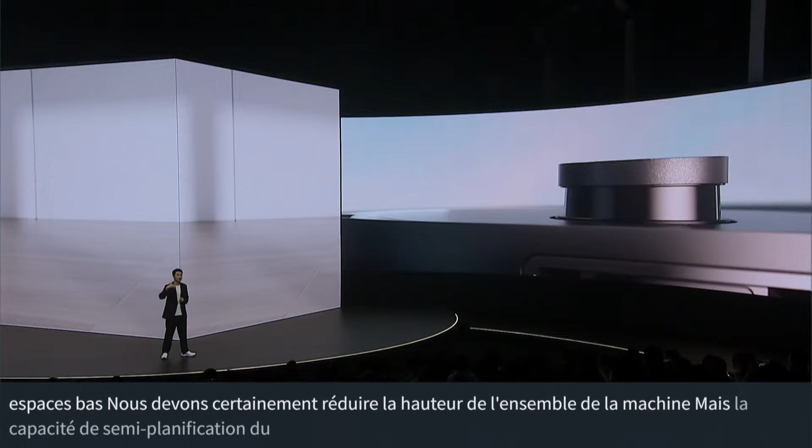First of all, when the robot wants to go to lower spaces, we have to reduce the total height of the robot. But when sweeping bots upgrade from gyroscopic inertial navigation systems to lidar navigation systems, it is doing a complete planning with a lidar module, which is normally 2 to 3 centimeters higher than the machine, so that it can have 360-degree scanning and a map to navigate during its cleaning. But this protruding structure has also made most sweeping bots on the market higher than 10 centimeters, and that becomes the biggest obstacle for it to go to low spaces. But for furniture that needs cleaning at the bottom, a lot of them have a space lower than 10 centimeters, so obviously that will be a neglected part during floor sweeping.

Actually, in the early stages, there were some ultra-thin sweeping bots, but they had to sacrifice navigation or obstacle avoidance effect just for thinness. But how can we ensure we maintain the smartness while also having access to lower spaces? That is the topic we wanted to research.

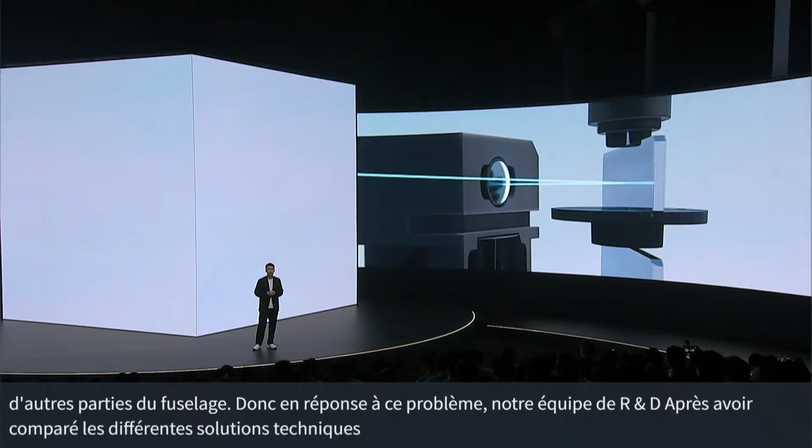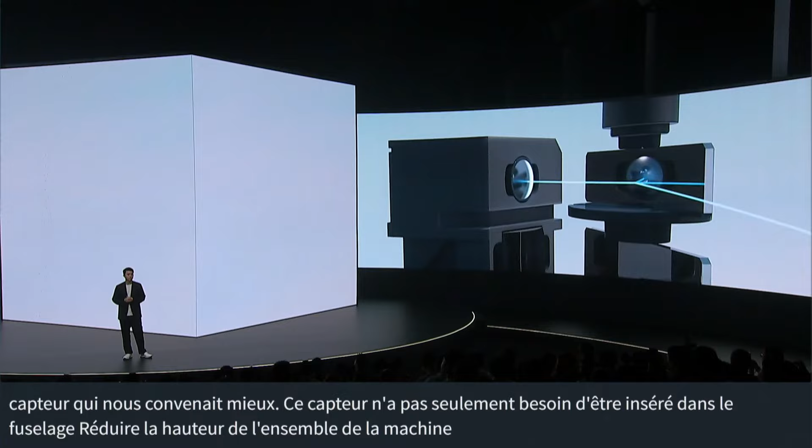We wanted to find a perfect alternative solution to replace the protruding part at the top. But we know that module, either LDS or DTOF, they all fall into the category of rotating mechanical lidar, which cannot be installed on other parts of the machine. Because of this, our R&D team compared different technologies and proposals. We decided to develop our own sensors, which not only can fit into the machine to reduce the total height, but can also avoid dust entering the sensor, as well as shortening lifespan because of long-term use of the motor.

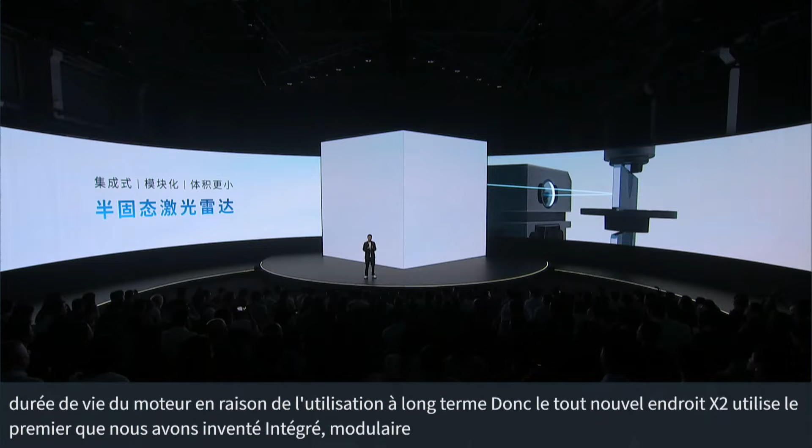So the brand new Deebot X2 is using this integrated, modularized, and more compact semi-solid-state lidar design we invented. We call this dual laser lidar, which is a composite laser sensor of a dual transmitter dual receiver system with doubled field of view. It has achieved 210 degrees angles of view. It can have more than 20,000 hertz ultra-high sampling frequency, so it can respond faster. It can be 24 times the traditional LDS in terms of detecting small objects, and also doubled what can be achieved with DTOF.

With this sensor and the algorithm, we can ensure the smaller sensor can fit into the sweeping bot. It can reduce its total height and also enhance its global planning capacity. We can also extend its durability. It has IP5X dust-proof closed design, which prevents dust from entering the module. It is more stable, more reliable, and more durable.

After we have chosen this alternative plan, the next step is where do we need to put it on the machine? First of all, we need to know the major task of such a sensor module is to help the sweeping bot localize itself in the home environment. If you have used sweeping bots, you know the lidar used to work by rotating 360 degrees. If we replace that with semi-solid-state lidar on one side, is it possible for it to detect the domestic information?

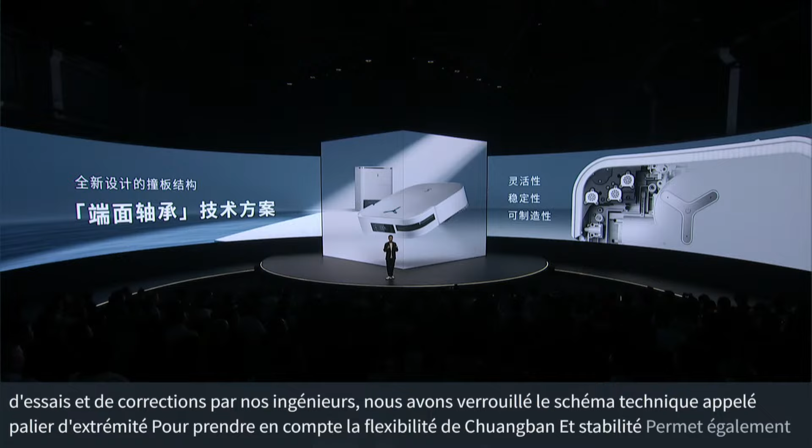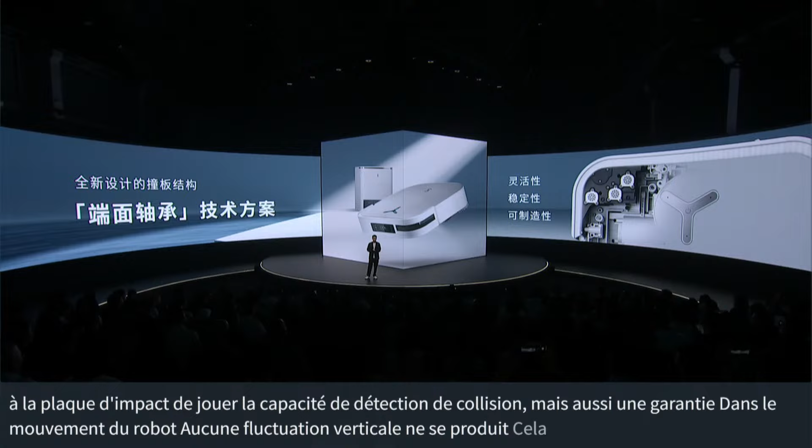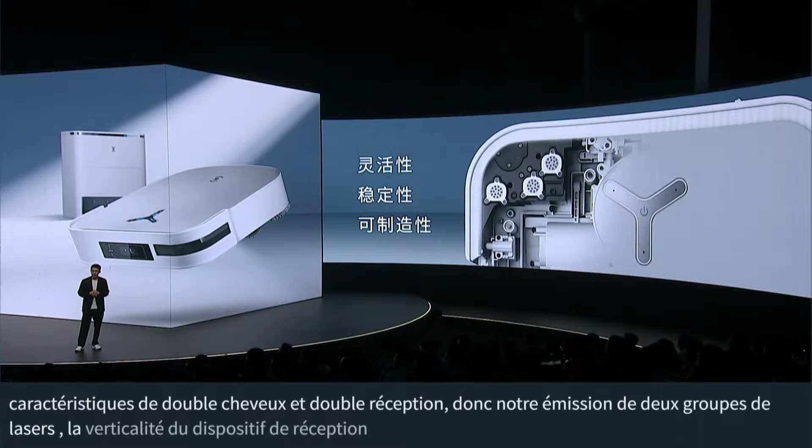After a lot of tests and correction, we have finalized the technical plan of end-face bearing to take flexibility and stability into consideration. So the bumper can have bumping sensing, but also it will not have vertical movement, and it will not impact the consistency of the LiDAR transmitting surface level. Because this has a dual transmitter and dual receiver, it has a very high requirement for the verticality, parallelism, and stability of both sets of the laser. That gives some challenge to our design capacity and manufacturability.

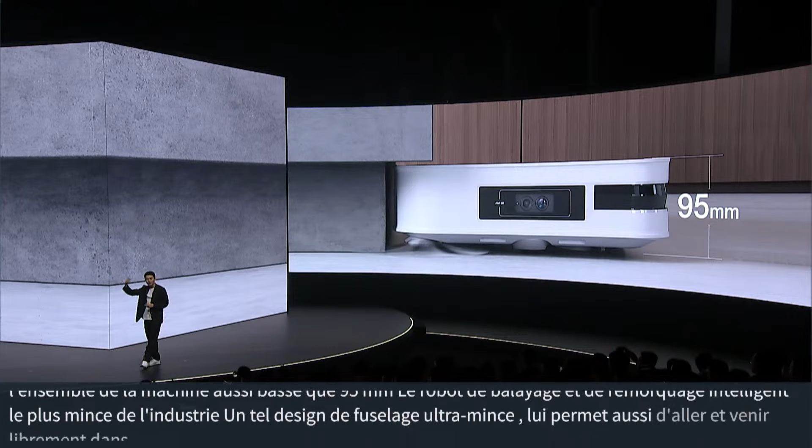Ultimately, we have put this more powerful LiDAR module into the machine, creating the integrated sweeping bot with a total height of 95 millimeters, which is the thinnest in the industry. Such ultra-thin design makes it able to access low spaces so that it can increase its cleaning coverage, but also maintain its strong global planning and localization capability. We believe for such innovation, which starts from products and from consumer needs, it combines with optics and algorithm transformation. We also need to ensure the quality of our delivery. Only an enterprise like Ecovacs that has both research and manufacturing can achieve such results.

In addition to the sensor and the total form factor redesign, we have also significantly improved the key cleaning performance of the sweeping bots. Let me introduce that to you. First, let's talk about edge cleaning. Actually, one of the biggest complaints from consumers about current sweeping bots is insufficient edge cleaning of round-shaped sweeping bots, because corners between walls and furniture usually accumulate a lot of dust.

But when a round-shaped machine meets a right-angled corner, it cannot fit very well. When it goes to the edge, because of the intrinsic constraints of the round shape, it cannot have perfect edge cleaning. That's why the cleaning of the edges and corners have always been a pain point for the industry. So we believe in order to solve the problem of edge cleaning, we need to jump out of the box. Our choice is, as you can see now, making sweeping bots from round to square, so the right angle will be aligned with the right angle so that we can reach the edges.

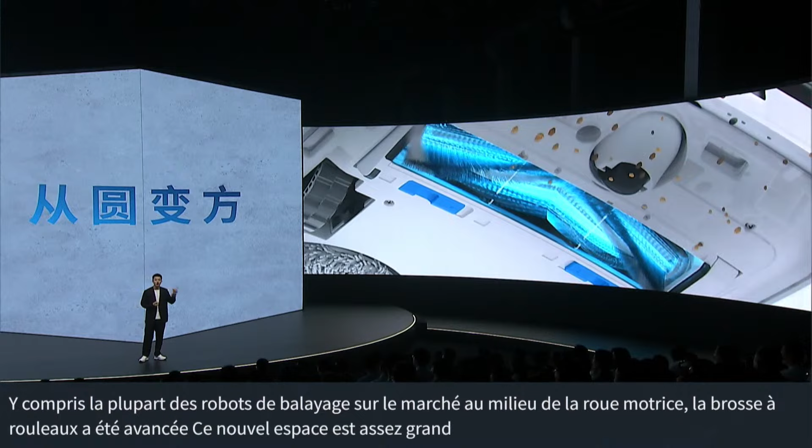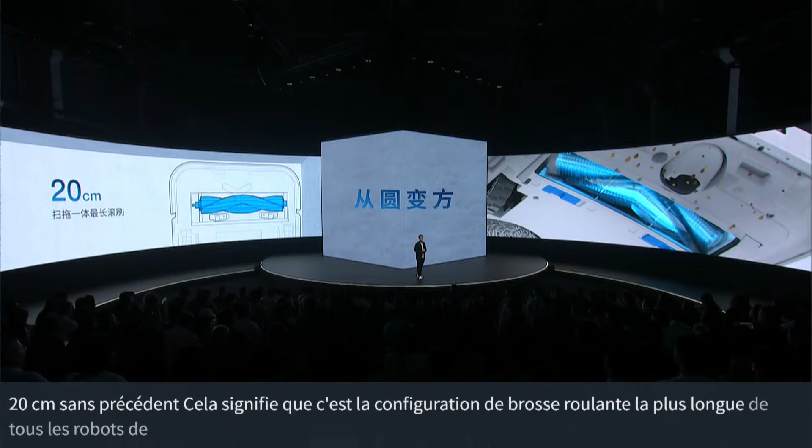This new space is big enough, and the main brush is also extended to an unprecedented 20 centimeters. This is the longest main brush for all sweeping bots on the market. We have also combined it with an upgraded 8,000 Pa suction power, so the cleaning efficiency is enhanced by another 20%. Thank you.

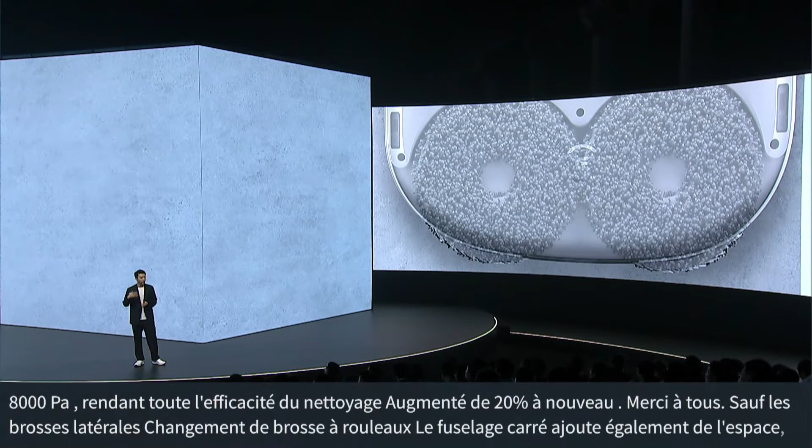In addition to the side brush and main brush, the additional space of the square-shaped machine allows the driving wheel of X2 to be extended. The mop plate will no longer worry about friction with the driving wheel, so that it can be further optimized.

For the brand new X2, we have shortened the gap between the wall corner and the mop plate, which has gone from 5.5 centimeters to 3 centimeters. So it has increased the sweeping and mopping coverage by 11.6%.

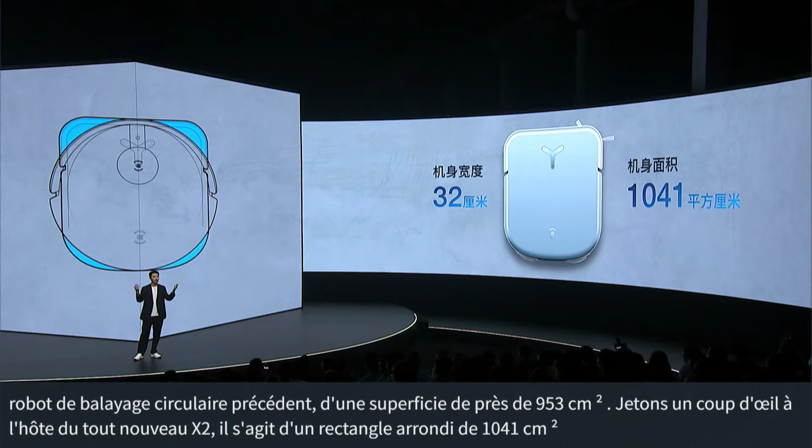Let's look at this picture. This is the old round-shaped sweeping bot with an area of 953 square centimeters. When we look at the new machine, it is a rounded rectangle of 1,041 square centimeters. By this comparison, we can clearly see the machine has more space, but the width has become narrower compared with the former 36.2 centimeters.

The width of X2 is only 32 centimeters, which is the thinnest in the industry. That also shows it can have access to more narrow spaces. In addition, although it becomes slimmer, we have significantly improved the internal structure of the machine, so the dust box space has increased by 14%.

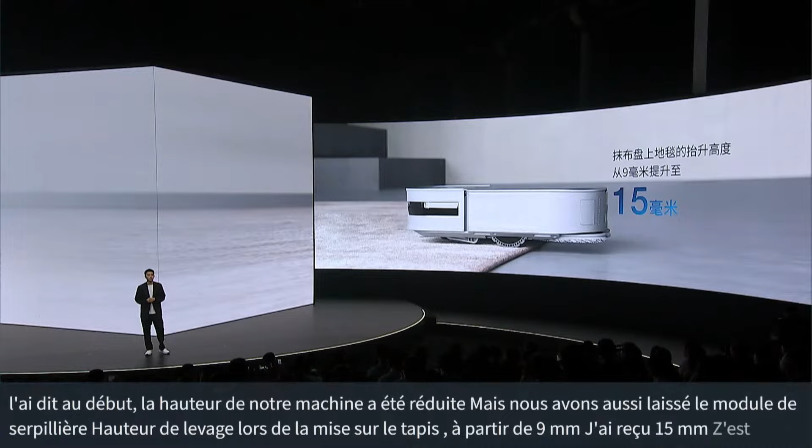The water tank capacity has increased by 125%, so the sweeping bot will have a more complete and efficient experience for each cycle. And also, although in the beginning I said the total height has reduced, we have made the elevation height of the mopping module increase from 9 millimeters to 15 millimeters, which is definitely the highest record for elevation solutions on the market.

So, through my introduction, we can see X2 is a completely redesigned new product. Also in terms of the arrangement and design of the overall structure, it has enhanced accessibility for lower and narrow spaces, cleaning coverage of unit area, stronger vacuum cleaning and sweeping capability, and also an enhanced experience. I'm sure Ecovacs, as one of the brands with the longest history in the industry, we never compromise on our cleaning capability, and we are going to enhance the cleaning capacity once again with X2.

So, apart from the square shape and the cleaning capability improvement brought by it, the other important aspect of a sweeping bot is its intelligence level, which is also a big aspect impacting user experience. It decides whether the sweeping bot can traverse very effectively and freely in the complex and dynamic home environment. So, in the square shape, the further core improvement is to have more accurate positioning and more nimble path planning.

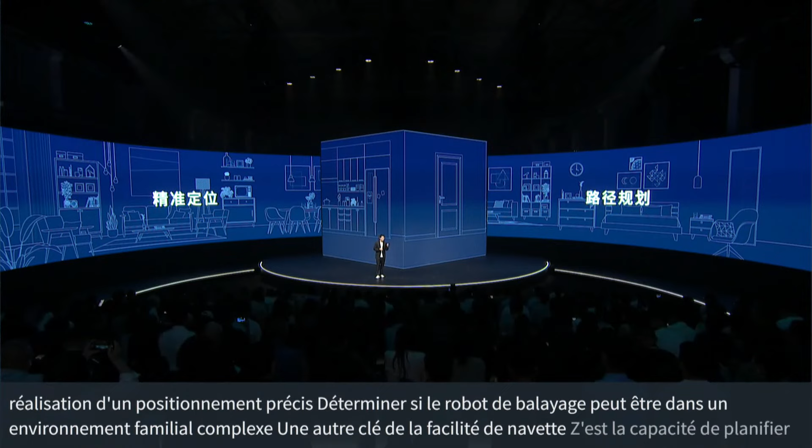And also, while realizing accurate positioning, another deciding factor on whether the robot can traverse very effectively in the complex home environment is path planning capability, because in the home there's not only static walls and furniture, but also moving human paths, doors, and occasionally fallen objects.

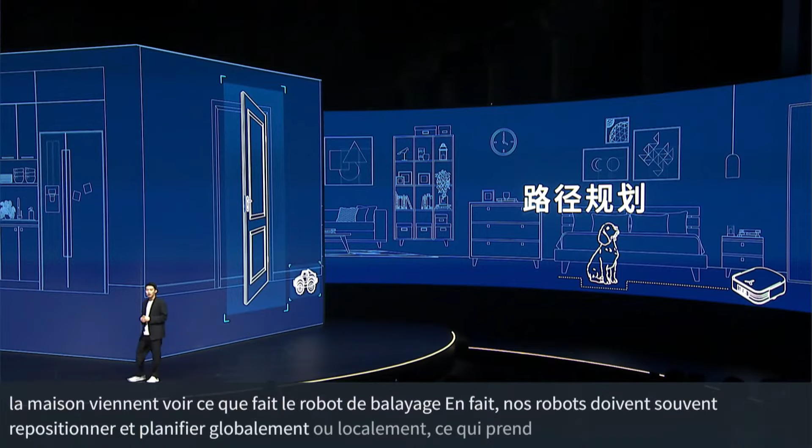So the sweeping bot, when planning the path with traditional algorithms, needs to rely on the established map and plan the path in advance. And when the designated path is blocked, for example, the path changes and the bot checks what it's doing, so the bot needs to do local or global planning again. Normally it's very time consuming, and sometimes it can cause hesitation or getting stuck.

So when faced with the ever-changing and various home environment, what Ecovacs thought was that we need to use better and newer technology to deal with them.

And then we introduced AI into the robots. If you are familiar with Ecovacs, you know that we are one of the earliest explorers. We continuously use AI to enable robots, and we have been exploring for many years. As early as 2018, we already deployed deep learning and enhanced learning, the two AI technical roadmaps.

First of all, for deep learning, in the sweeping bot graphic recognition, the implementation is reflected in the 2019 launched our own patented AIVI Deebot product. And then, with the combination of structured light and camera, we trained a better deep learning model and helped the sweeping bot further enhance its capability of object recognition, accuracy, and obstacle avoidance. And in 2021, the AIVI 3D tech-enabled X1 is the first implementation.

On the other hand, we continuously invested in enhanced learning. Enhanced learning is a kind of machine learning algorithm so that the robot can get experience from testing errors and then continuously improve the decision-making capability and improve the work performance. So when it comes to sweeping bot, it can help improve its decision-making capability and adaptability so that it can more effectively and flexibly conduct path planning, dynamic adjustment, and finish the mission.

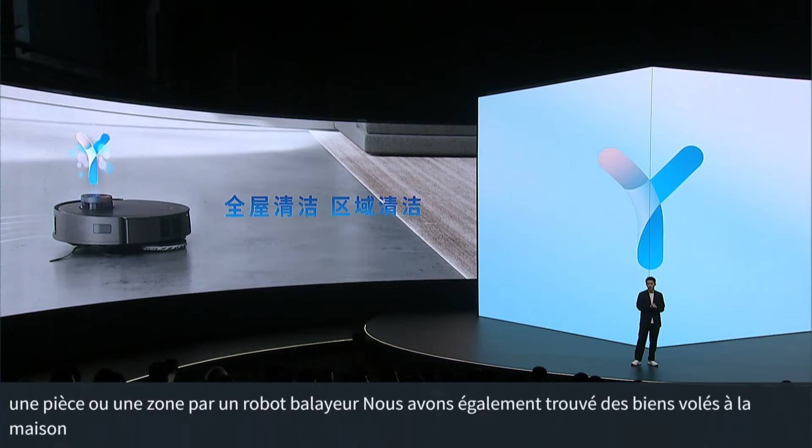At present, among the instructions from consumers, around 62% are commanding the robots to go to certain rooms and areas to clean. We also discovered that stains or dirt on the ground normally take place in an area without a name, for example beside the couch and the table, or in between the TV cabinet and the tea table. More than 10% of users are trying to use Eco instructions to clean these blurry areas. That means users have a very strong demand to use voice commands to realize more refined cleaning.

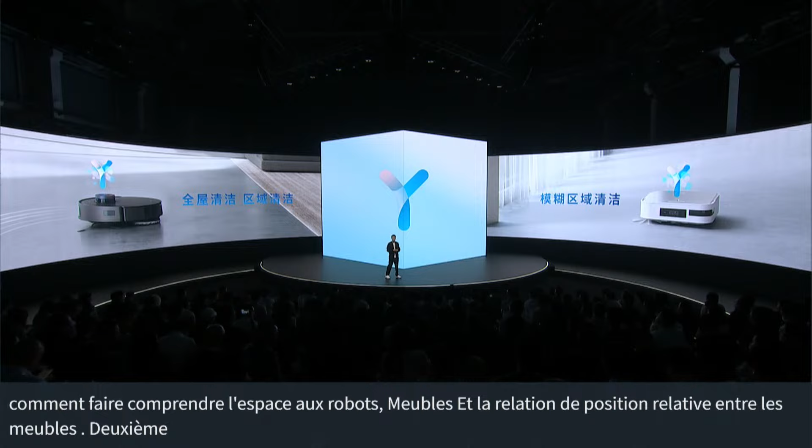So this time, we need improvement in two aspects. One is to think about how we let robots understand the space, the furniture, and the correlation between furniture. Second, we need to continuously improve the capability of the robots to understand different habits of instructions.

First, how do we let the robots understand the relationship of furniture location better? We need a clear furniture map. It is an innovative application of a knowledge map in the home environment. When X2 establishes a map, it treats furniture and rooms as entities and establishes a knowledge map that covers all the furniture, rooms, and their correlations. This is another important breakthrough technology developed by ourselves.

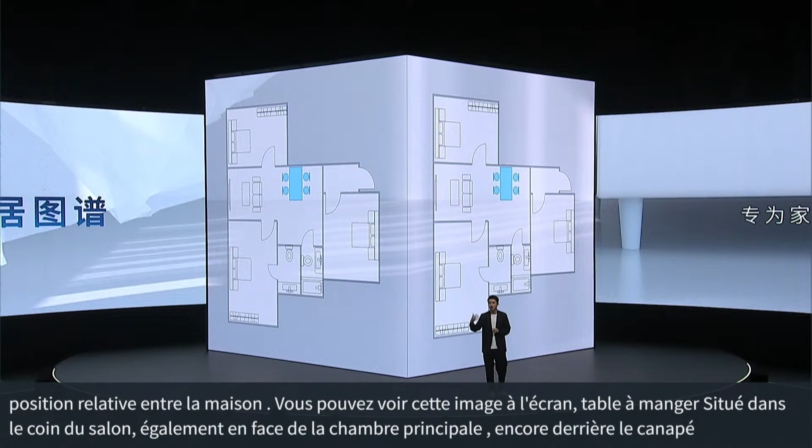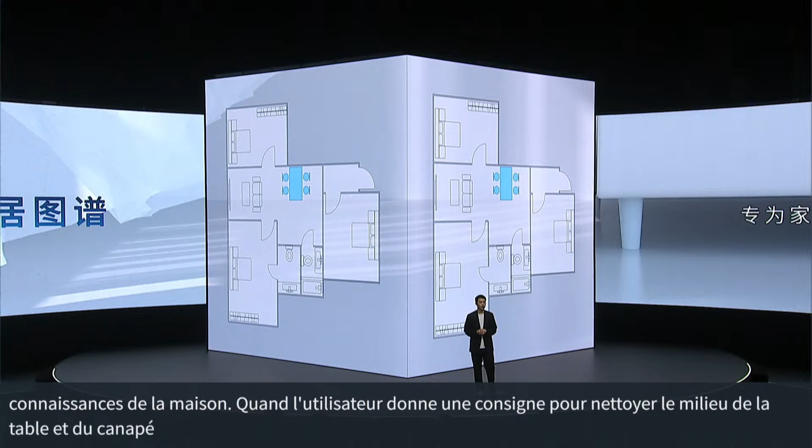With our map generative algorithm built for the home environment, we can help the robot understand the correlation between furniture and rooms. For example, on this picture, the table is at the corner of the living room, on the opposite side of the master bedroom, and also behind the couch. These relationships are very complex, but we can use the furniture knowledge map to scan that. When the user gives the instruction to clean in between the table and couch, X2 can find the area.

When the furniture map concept is established, the robot also needs to handle possibly misleading instructions. For example, to clean the couch in the living room, or clean beside the couch in the living room. Our solution is that we self-developed a set of inference logic, so we can judge the intention, conduct semantic breakdown, and screen out the ambiguity to realize very accurate interpretation of complex instructions.

Because the robot understands the location and understands the language, it can perform the instructions. So let's take a look at this sentence: 'Okay Eco, use max water volume to mop around the shelf in the bedroom beside the living room.' You might still be thinking about what this instruction means, but Deebot X2 can already take off and do the cleaning. The response is faster, the dialogue is smoother, it understands better, and the destination is more accurate.

This is the charm of the brand new Eco Voice Assistant, and I believe this is definitely the ceiling of HMI right now.

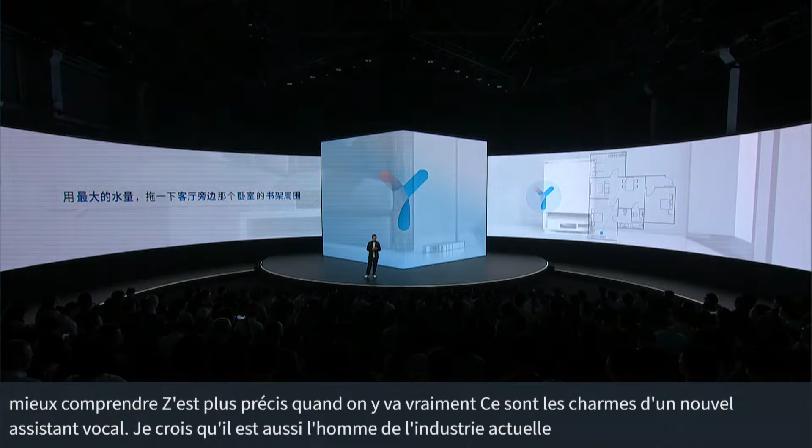Apart from the revolutionary innovations I mentioned, Deebot X2 also realized 10 full functions but a smaller size, the 10-in-1 all-in-one Omni station, and we also have breakthroughs in the 3D map and an ultra-large battery. Behind the stage, there are more than 100 innovation patents for X2, and that demonstrates our capability and our attitude on innovation.

It's because we focus our values on users first, that's why we came up with this square-shaped sweeping bot. We hope through this kind of game-changing innovation, we can drive the upgrade of the whole industry. To be frank, it's maybe difficult to avoid copycats, but we always believe that when you really start from consumer needs, from industrial development, our initial intention at Ecovacs is to continuously bring us to a higher level of sweeping bots.

In addition to Deebot X2, in the three-dimensional space of a home, Ecovacs has been exploring other robotic products. Now let's continue with our next chapter.

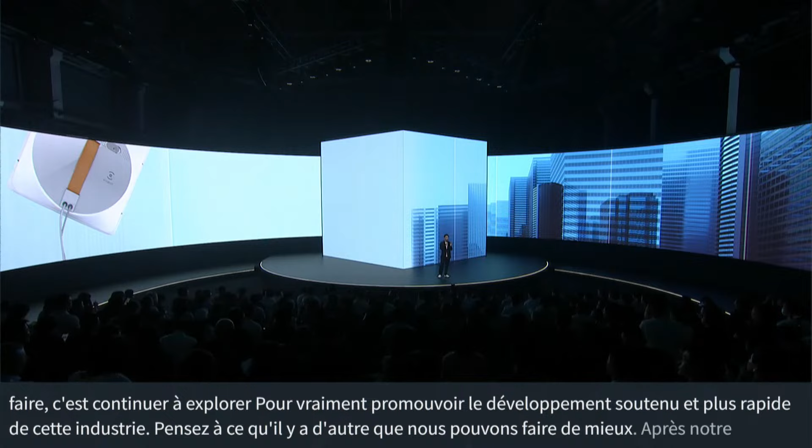We want to continuously explore to do things even better in this field. So after our market research, we found the current window cleaning robotic products on the market still have a big gap from the ideal window cleaning robot in the user's mind. First, it's not easy enough.

There are too many preparation steps before starting. Second, the cleaning is not sufficient. Usually the edges are not cleaned very well. Usually that's a pain point for the users.

Third, consumers will still be afraid that the window cleaning bot might fall down when they are working at height. It's because they haven't found the ideal window cleaning solution. But if we want to promote the category development and enhancement of the penetration, we need to address those key pain points of the consumers.

That's why we're going to bring you the brand new window cleaning robot Winbot W2, which will also be the biggest evolution and revolution of Ecovacs window cleaning robots. I'm sure it will significantly enhance the satisfaction of window cleaning products among consumers. Now we're going to unveil the brand new generation of window cleaning solution with no limits.

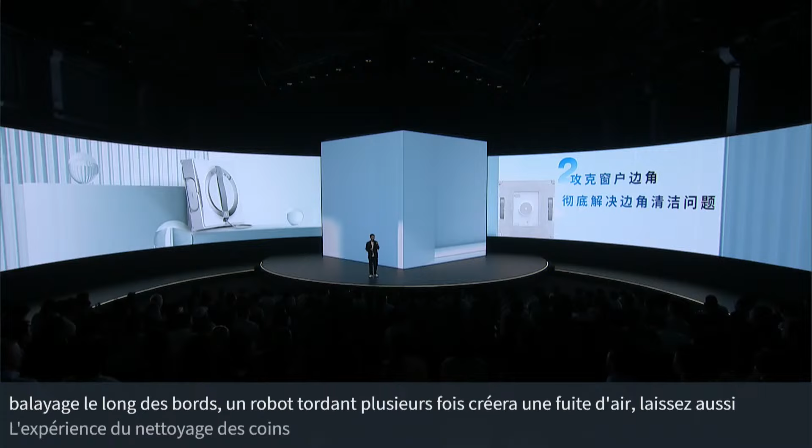Usually window cleaning robots move on the window relying on 2 tractor treads. But sometimes there are obstacles at the edges of the windows, and there can be air leakage when it moves multiple times, so the cleaning is not sufficient.

So we're going to further enhance our cleaning capability. We have fully upgraded the movement system of Winbot, and I think the edge cleaning problem is finally solved. The brand new Winbot W2 increases motor torque by 40%, and the material durability of the tractor tread is enhanced by 30%. Even in scenarios with a lot of dust and wet mopping, we can still maintain strong movement capability.

We can optimize the front and rear bumper so it can avoid obstacles. These hardware and software upgrades combine with the advantage of the square shape for edge cleaning. The edge cleaning and dust accumulation issues of windows will be significantly improved.

Through these revolutionary innovations, what we can feel is that the W2 not only wipes more cleanly, it can adapt to all kinds of windows and glass shapes. From clean to cleaner to clean at higher efficiency, we can say that Winbot is always improving.

Apart from the safety brought by the new multifunctional station, we further upgraded the W2 bot's safety configuration to guarantee working at high safety. When Winbot is on, it will generate suction power of 2800 Pascal so that it can absorb to the window.

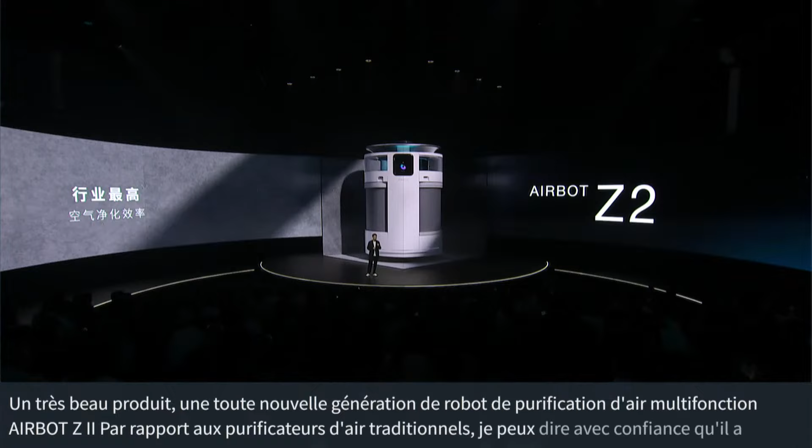Very beautiful product. The brand new multifunctional air purification robot Airbot Z2. Compared to other traditional air purifiers, I can confidently say that Z2 has higher air purification efficiency. Besides guaranteeing the purification efficiency, within the limited robot body, it integrated purification, humidification, sterilization, fragrance, and breeze functions. It can definitely satisfy multi-scenario and multi-dimensional demand. This is actually the masterpiece of the industry's prime.

Why do we dare say that Z2 has the highest air purification efficiency? The answer is still that it can bring the full house mobile purification experience brought by the autonomous moving of the robot, which cannot be matched by fixated air purifiers. In Z2, the mobile capability is upgraded to a new height, and it transferred from autonomous movement to smooth traverse, which provides the guarantee of full house purification.

To realize the smooth traversing, on Z2, we conducted a lot of improvement in navigation and obstacle avoidance. In navigation, within the same home environment, there are some commonalities across different robots. So Z2 is also loaded with the DTOF navigation module, and it can realize map establishment and positioning, so Z2 can understand its location at any time at home.

But the real challenge lies in obstacle avoidance, because we cannot just copy the solution of sweeping bots, since this robot is bigger, heavier, and higher. So when it's moving, the probability of hitting different objects at different heights is also higher. This time, Z2 needs to conduct better recognition on different heights of objects.

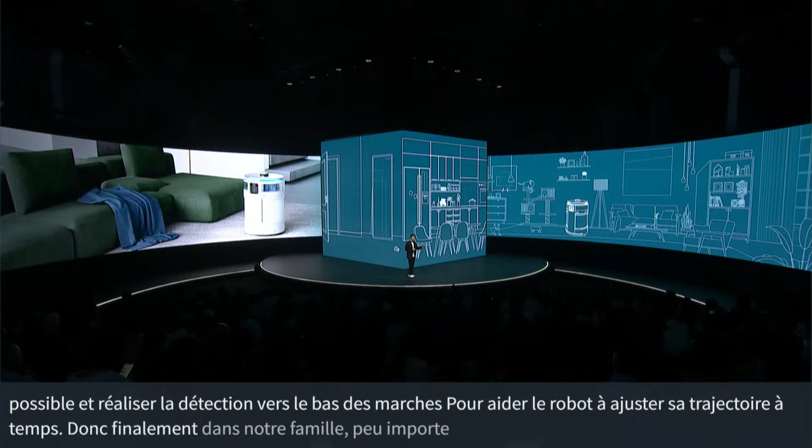And also for the lowest threshold at home, we added 2 iTOF sensors which are 25 degrees to the vertical direction so that Z2 can more accurately detect the height of the threshold to know whether it can pass. We can also conduct downward detection of stairs so that we can adjust the trajectory of the robot. So no matter how complex the ground is, for high, mid-height, or low objects, or for frequently moving people or pets, Z2 can always move at 0.5 meters per second and conduct avoidance very accurately and move freely.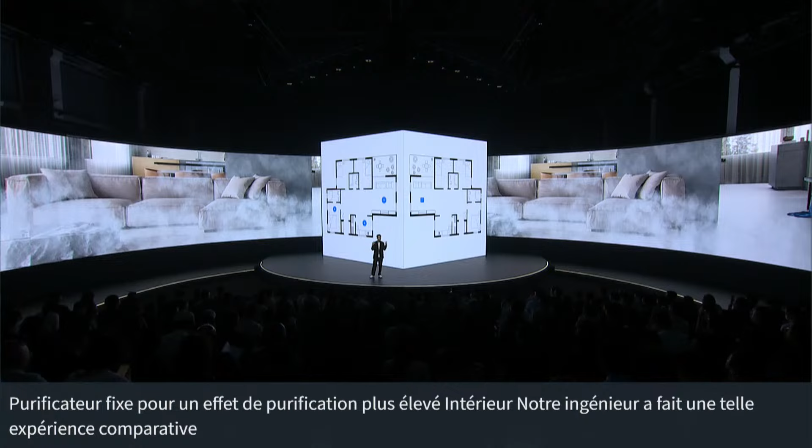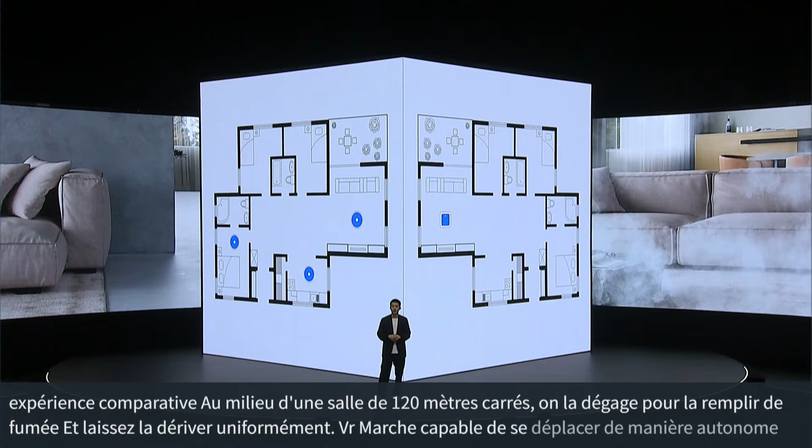And that was how we enabled higher purification efficiency compared to fixated purifiers. Our engineers conducted this comparison. Within a 3-bedroom apartment of 120 square meters, we injected smoke and dispersed it evenly. For Z2, it can travel freely in different rooms and quickly conducted the purification and reached the GB standard. The total time used was 75 minutes. But you have to know, with the same scenario, we used a fixated air purifier at more than 10,000 RMB with a CADR of 1,500, and we placed it in the room. To realize the same result, it needed 152 minutes, which is twice as much. So we dare say that Airbot Z2 is the highest purification efficiency product.

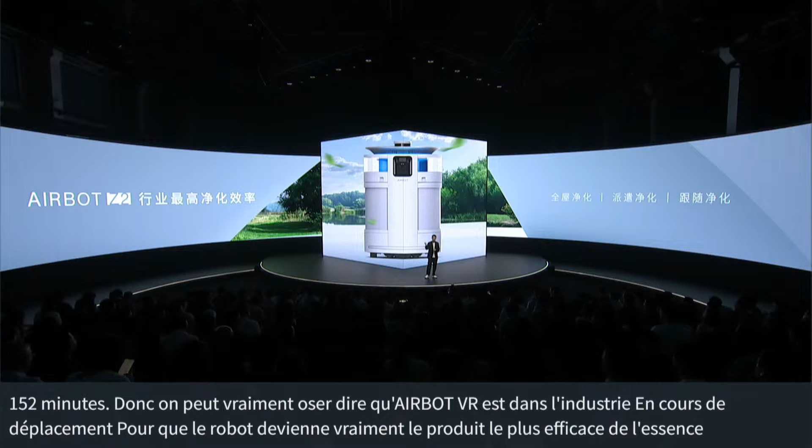With the assistance of smooth traversing, we can realize different operation modes. For example, in the experiment, we used mobile purification. It can smoothly move in different rooms and conduct the purification. Then we have purify on command. Our voice assistant is also embedded in Z2, so with just one instruction, we can call it to a certain room. We also have the follow-me mode. Z2 can identify the human, so when you initiate this mode, the robot can follow you anywhere at home. You definitely want to try that, a robot that follows you everywhere. You can also tell Z2 to stop anywhere you want and purify that place. So we know that the advantage of mobile purification is all-round.

Apart from that, let's take a look at the 5-stage rejuvenation system of Z2. Right now, air quality is getting better, and our users' demands on air management are not just about PM2.5 and aldehyde removal. In recent years, the requirements by consumers on humidification, fragrance, anti-allergy, and sterilization are increasing. This means air management at home is getting more complex, and the requirements are getting higher, so we need to cater to different needs. Let's take a look at the Z2 5-stage deep rejuvenation system.

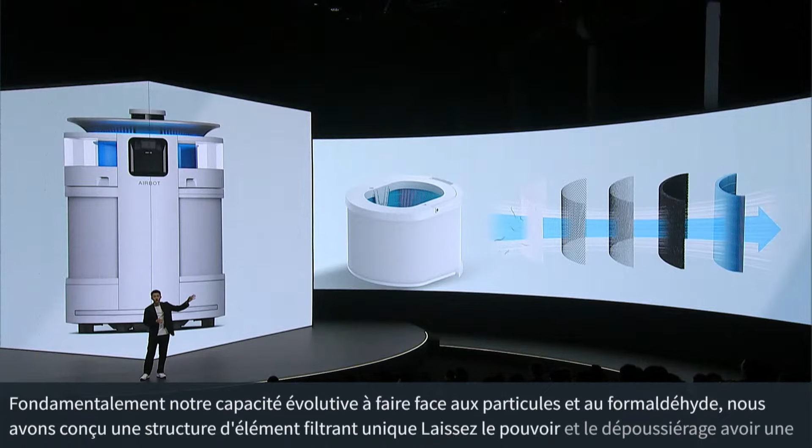The first stage, which is also the foundation of air purification, is the purification capability. For particles and formaldehyde, we use different filter designs. We have very good performance in dust removal and aldehyde removal. You can see we have a multi-layer composite filter - the inner layer is HEPA, which is key to removing PM2.5. The height, number, gap, and cutting width of each layer is accurately designed to realize very high CADR. For aldehyde removal, we use modified coconut shell activated carbon and super active carbon as the carrier. Compared to traditional active carbon, this has better absorption power, making it the best aldehyde removal material.

Z2 is also loaded with amino acid deodorization crystal. We use aminogen and amino acid to react with formaldehyde, and we speed up the decomposition of formaldehyde, creating harmless water and hydroxymethyl derivatives.

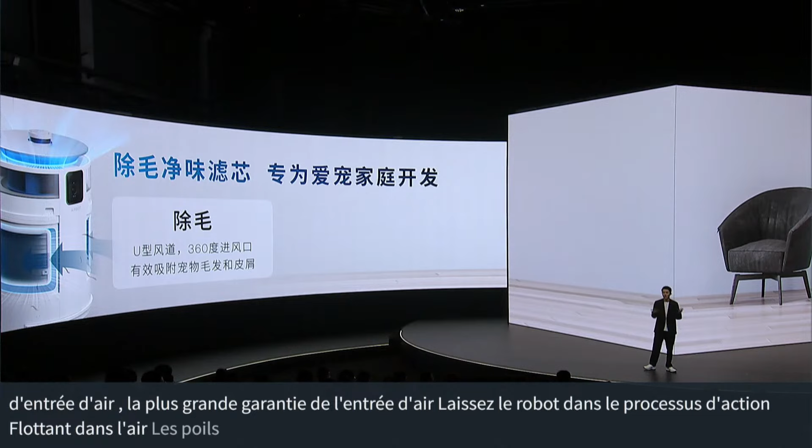While we developed Z2, we not only removed dust and formaldehyde, we also noticed that pet hair has become another factor impacting air quality because it can lead to allergy of respiratory ducts. According to our survey, we found among Airbot Z1 users, 25% are pet owners. That's why we prepared a deodorant pet hair filter for those pet-raising families. This filter uses a U-shaped air tunnel structure combined with a 360-degree air inlet design, which ensures sufficient air inflow so that pet hair and dandruff floating in the air can go into the filter. Because pets are everywhere, the robot should also be everywhere to help you solve the problem with pet hair and smells.

By opening the outside cover, you can see the allergens attached to the felt layer. It can be peeled down very easily, so it's very convenient for replacement. If you raise pets, sometimes the smell can also be a potential issue. Traditional air purifiers claim they can remove smells, but most of the time they use activated carbon, which can also create a sour flavor. Our deodorant pet hair filter uses a multiple structure design of modified coconut shell activated carbon plus super activated carbon. It is very efficient at removing smell sources and allergens, which can really prevent odor, pollution, smell, and allergy.

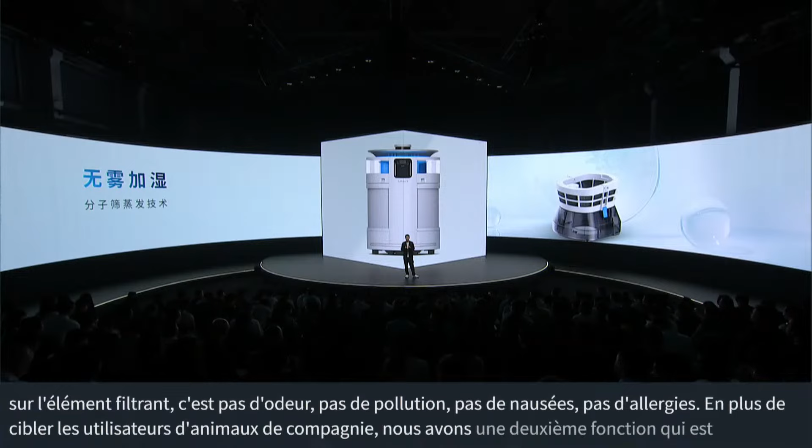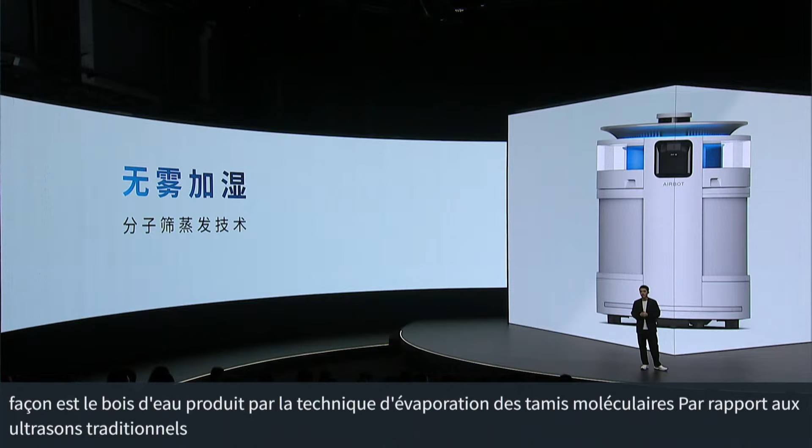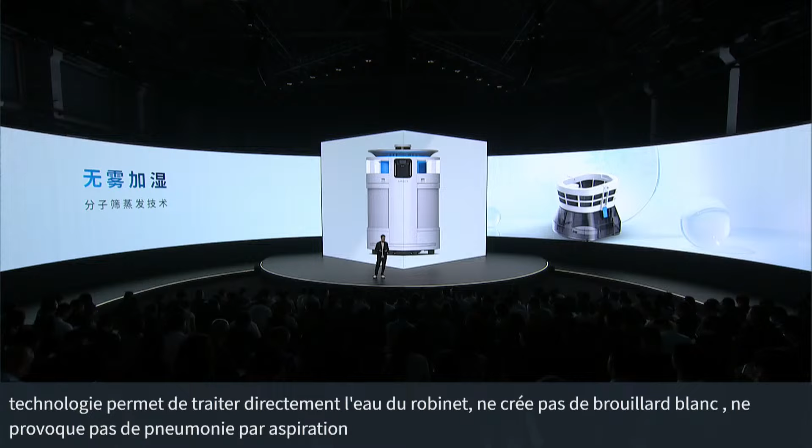We also have another function, humidification. We have adopted the most healthy fog-free humidification, which uses molecular sieve evaporation technology to create a water curtain. It can directly process tap water without creating white fog, without triggering aspiration pneumonitis, and it will not wet the furniture and floor around it. A 2 liter water tank can ensure 12 hours of continuous humidification.

But having a water tank doesn't mean there won't be bacteria. That's why we also have a solution for sterilization. On Z2, we have a more comprehensive solution.

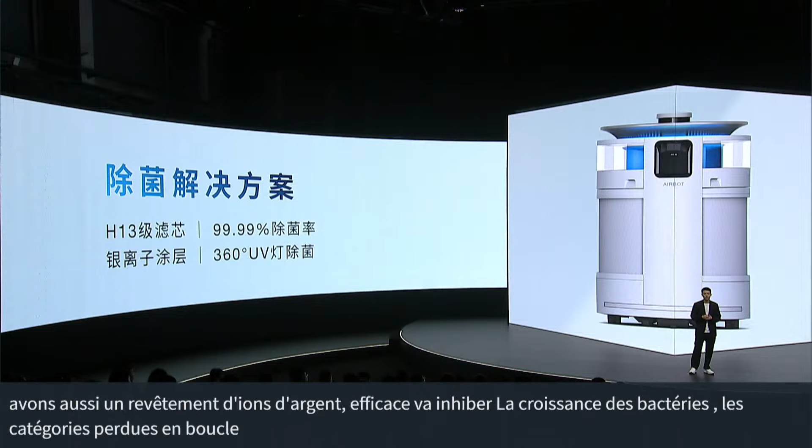Its air duct structure adopts an H13 grade filter, which can achieve a 99.99% sterilization rate. In the water tunnel design, the wet pad has a silver ion coating, which can significantly kill bacteria. On the inner side of the wet curtain, in a ring shape, there is an ultraviolet light which achieves real-time bacteria killing. So Z2 can ensure every breath of air will be safe and clean.

The fourth function of this product is something a lot of female consumers would like - fragrances. On Z2, we have worked together with world top flavors and fragrances manufacturer Givaudan, who have customized 2 liquid fragrances for us: Lily and Amber, and Citrus and Vetiver.

While Z2 is working, the fragrance will be released through the side air outlet. It can bring breezes, but also fragrant smells which can be spread throughout the room. So the moving capability of the robot and the top-class fragrances working together, Z2 will bring a better home atmosphere.

We are professional in purification. We also have the top-grade humidification solution. We also have the reliable sterilization solution, and also top-grade fragrances. And the breeze is very comfortable. The 5 stages of the deep rejuvenation system of Z2, combined with its independent mobility capability, will definitely bring your air quality experience to an unprecedented height.

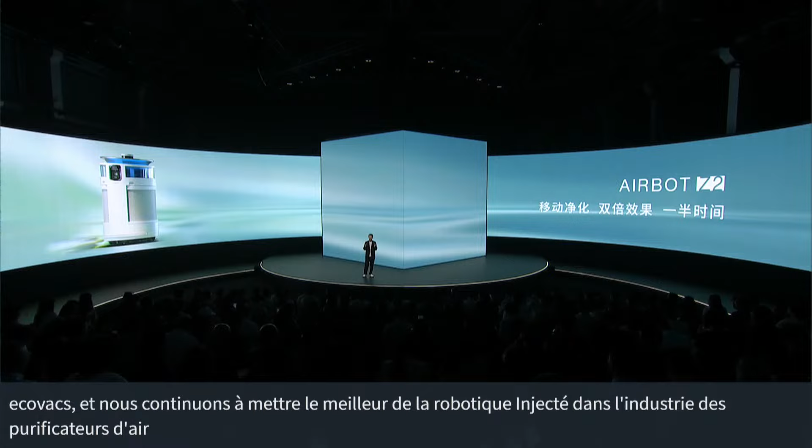Airbot is a very good example to show how Ecovacs continuously brings essential robotics technology into air purification products. We hope through the brand new Z2, we can bring a differentiated experience of mobile purification, but also promote smart technology and robotics technology of the industry.

After introducing X2, W2, and Z2, all these are game-changing new products. I'm sure you'll be surprised by their innovations. That is also what we are responding to in the industry, which has a lot of competition and is a little bit noisy. In recent years, I think everyone in this world has experienced a lot of noisy environments. But for me personally and all our colleagues at Ecovacs, we have been thinking - how can we utilize our products and our brand to solve problems and calm people's minds? Next, please allow me to bring you the final surprise.